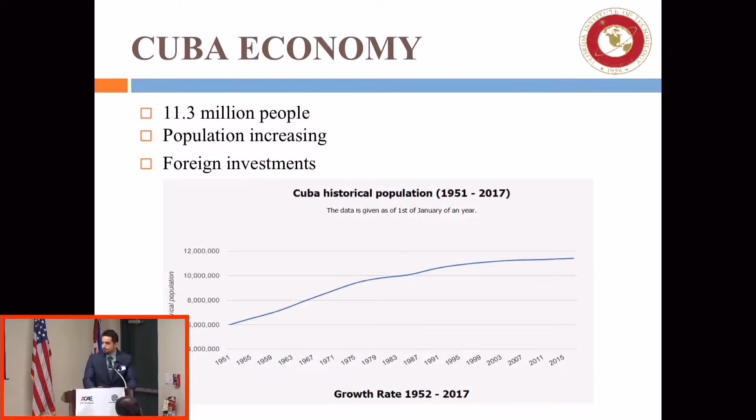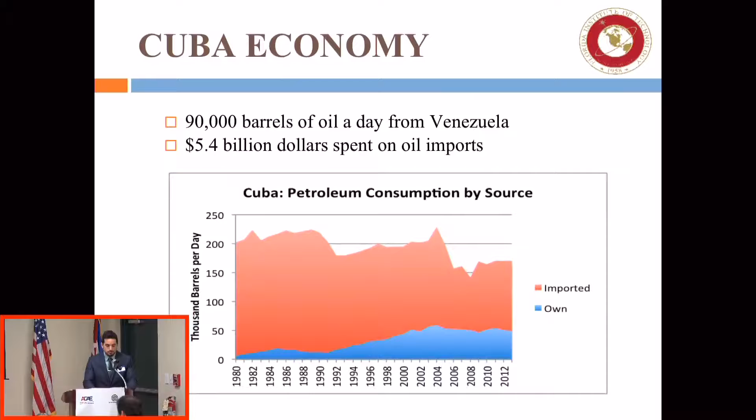Cuba is heavily reliant on foreign oil, as are many countries nowadays. In 2015, Raul Garcia Barrero, a senior official from Cuba's energy ministry, made it clear that getting off foreign oil is a high priority for the nation. The Cuban government also plans that by 2030, 24% of the country's energy needs will be sustained solely by renewable resources. This sum is pretty large, and the M-Wed team would like to contribute to Cuba's goal by leveraging the feasibility and simplicity of our senior design device to offset the cost of dependence on oil.

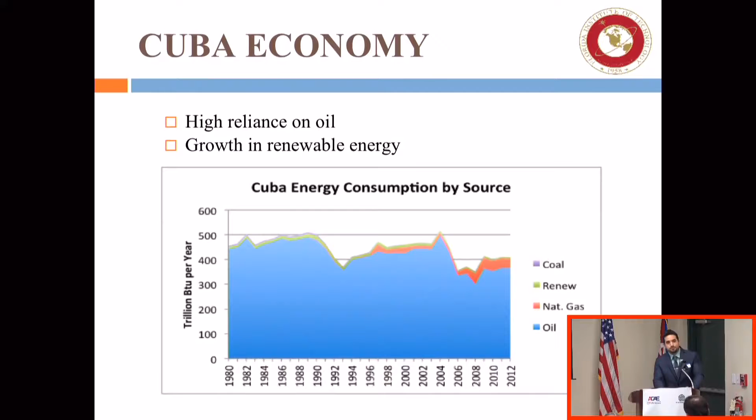So what is M-Wed? M-Wed stands for Magnetic Wave Energy Device. It utilizes the concept of Faraday's induction: a magnet oscillates through a coil, producing EMF, or electromotive force. As you can see in the image, we have three magnets. We also have a small-scale model on the judge's table. The first magnet is fixed, the second is moving, and the third is fixed as well.

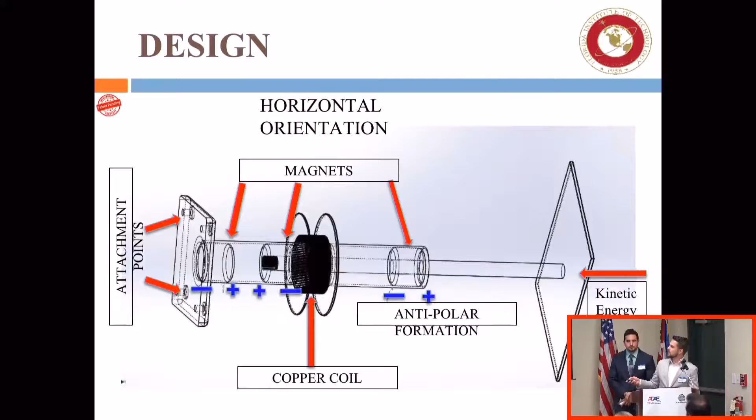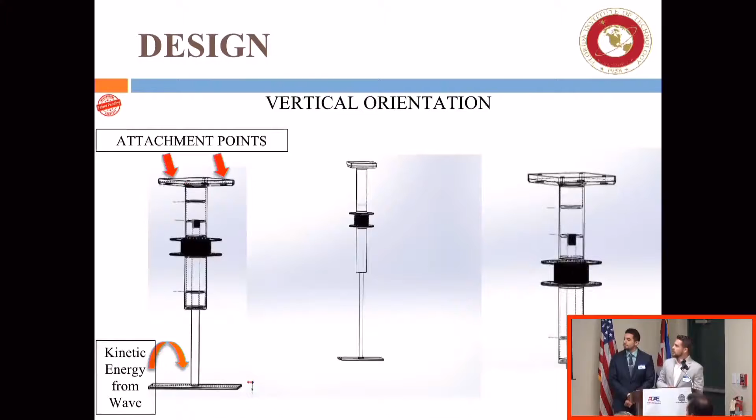The middle magnet is connected to this shaft. As it oscillates through the magnets, it produces EMF, and due to repulsion forces from the antipolar formation, it reverses direction and constantly oscillates back and forth. The kinetic energy from the wave exerts a force on the plate, causing the device to oscillate. We can do the same thing in a vertical orientation.

For analysis, here are some examples of what we did with our device. Initially, we created a 3D model to confirm it is in fact buildable. We also ran CFD, computational fluid dynamics, to determine the drag coefficients on the plate. Finally, we ran structural analysis to determine any stress points and strains on our device.

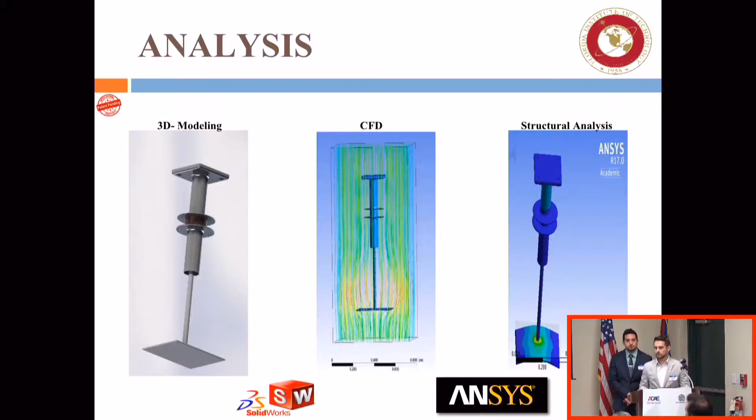The most significant analysis we performed is magnetic analysis. In this image, the blue area represents the magnet surpassing the coil, producing some voltage. That voltage, according to software we used called FEMM, Finite Element Method Magnetics, showed that in one oscillation we can produce 110 millivolts.

If we assume this device oscillates 1,000 times per day, it would generate about 110,000 millivolts, which converts to 110 volts. Utilizing Kirchhoff's power law, taking the 110 volts and receiving 3 amps from the software, we get 330 watts per device, approximately 0.33 kilowatts, or 7.92 kilowatt hours per day.

In one month, its efficiency is 237 kilowatt hours per month. To put things into perspective, the average household in the US uses approximately 908 kilowatt hours, a value we can achieve with 4 devices.

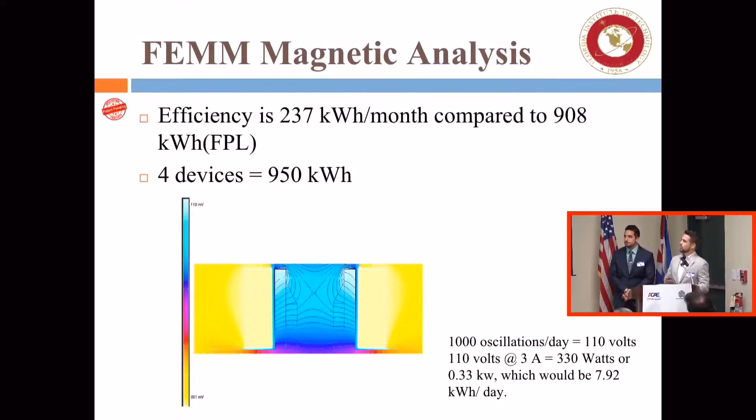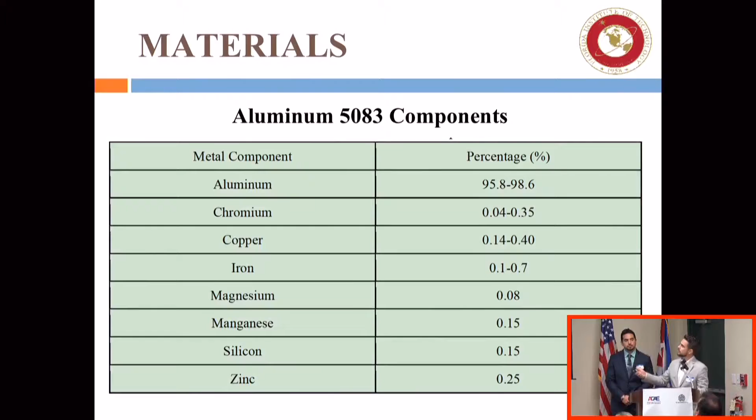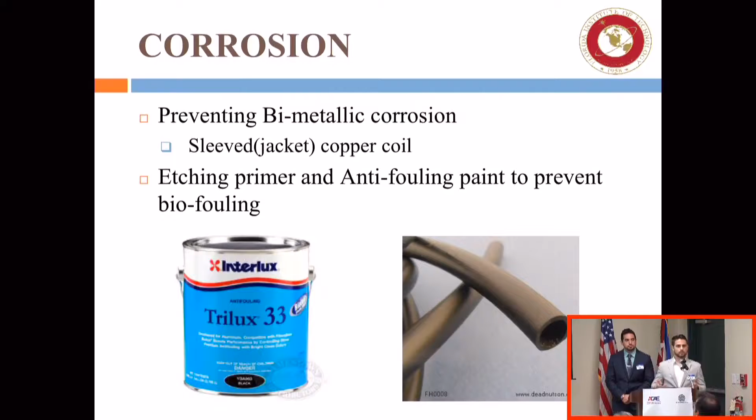Corrosion is a problematic factor when building ocean-based devices. To counteract bimetallic corrosion, we will sleeve our copper coil. We will also sleeve any screws that will mount the device to any surface. And in order to ensure longevity of our device, we'll be applying an anti-fouling paint to prevent biofouling. Biofouling is the growth of microorganisms such as tube worms and barnacles, anything that's placed in the water, on hulls of ships and such.

Welding itself introduces a lot of stress points in our device. We decided to pressure cast. On the image on your left, you see crack propagation, and due to the ocean, waves exert forces in the X, Y, and Z direction. So to be on the safe side, we decided to pressure cast.

On the image on your right, you can see how pressure casting is done. Basically, you make a mold of your device, you place your molten metal into the container, it goes through the refractory tubes, and your device is created, and then cooled.

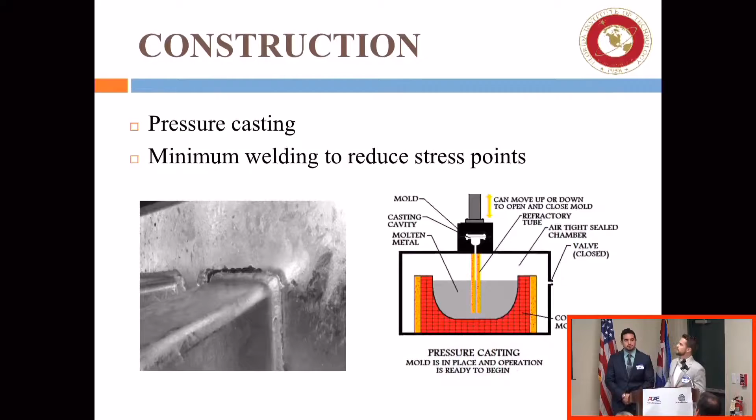Simplicity was also a very important factor of our device. You can see that we have a 6-piece assembly. The initial piece is the shaft shell, where the top magnet goes into it and it's fixed at the top. The bottom seal goes onto the threaded shaft here. Then the bottom magnet gets placed on top of the bottom seal, which goes onto the threaded shaft. The middle magnet is then threaded to the shaft, and all of this is put together to give you the device that you saw earlier and the device that is on the judge's table.

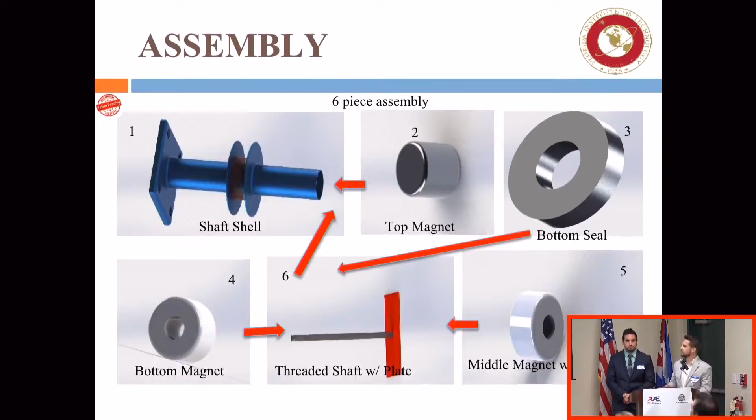This is our bill of materials. This takes into consideration current market prices of aluminum 5083, copper, as well as casting services. The casting services were determined from various companies throughout the state of Florida, and one device costs about $3,500 to produce. So earlier in the magnetic analysis, we said that we need 4 devices in order to produce the same as a US average household.

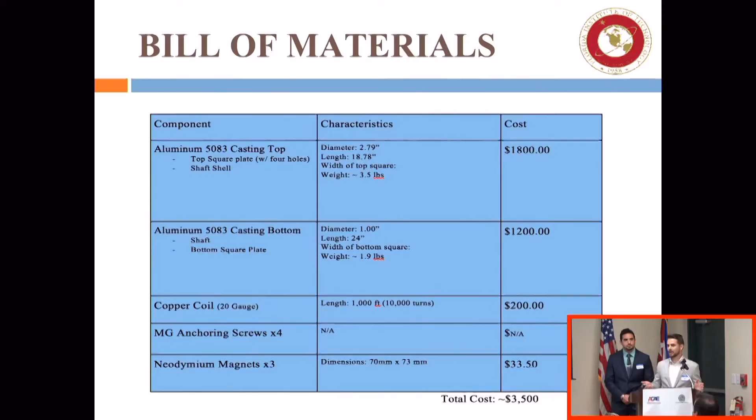So it would cost approximately $14,000. According to FP&L, in the US, we pay 12 cents per kilowatt hour. So in about 10 years, that costs about $13,000 to $14,000. So your return on investment for 4 devices would be about 10 years.

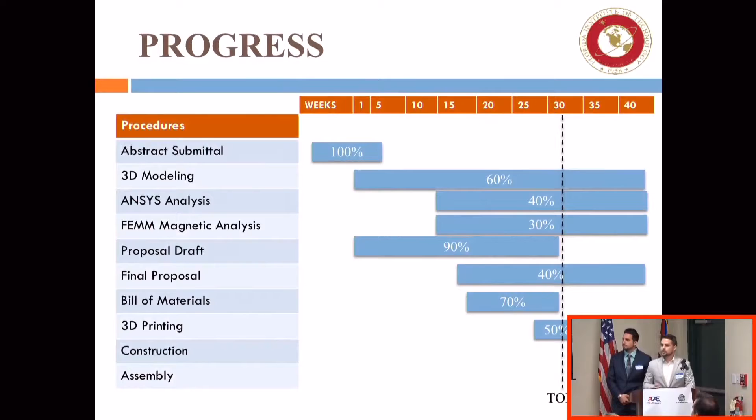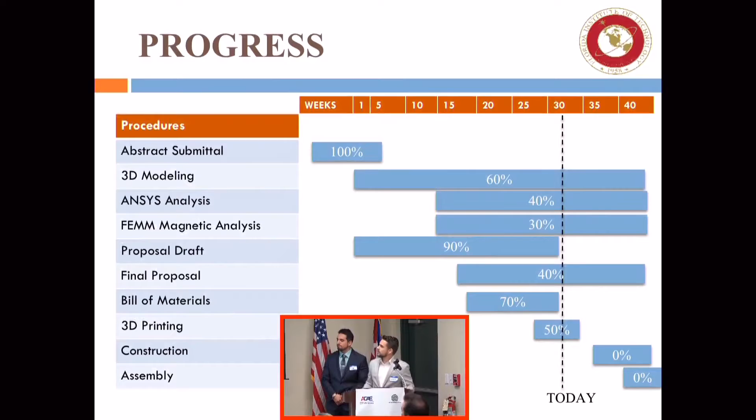And this is our Gantt chart. This just shows the progress that we've made in our research. Currently, we're at week 31, 32. So you can see that we've gone through all of these sections, including our abstract, 3D modeling. We will always continuously run analysis to make sure that we achieve the best efficiency. And we will soon be entering phase 3, which includes construction and assembly.

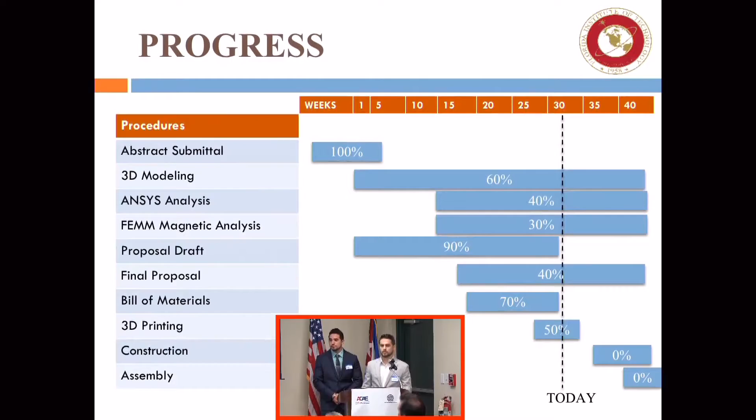The wave flows from the northeast direction with an average height of 5 feet, and it goes towards the southwest and northwest regions. The northwest region has a swell, generally caused by storms and hurricanes, which increases the wave height to approximately 9 feet. These waves generate big waves, and these big waves are not necessary for our device, as our device requires small waves and oscillations which move the shaft easily due to the force caused by the magnetic field. The northeast region also has swell, but it's reduced due to the Bahamian islands, which reduces the wave height to approximately 5 feet, which is suitable for our device.

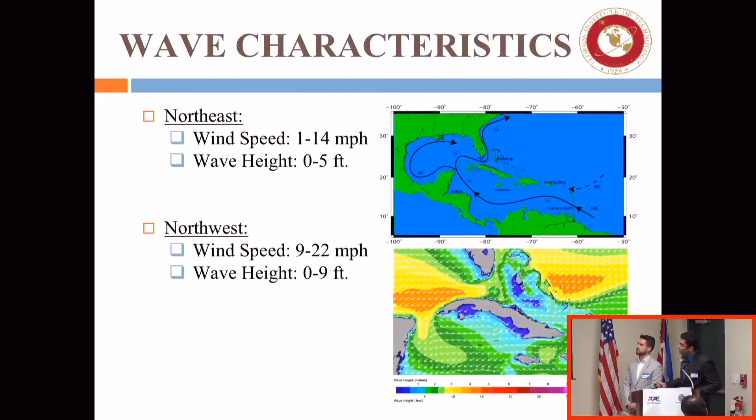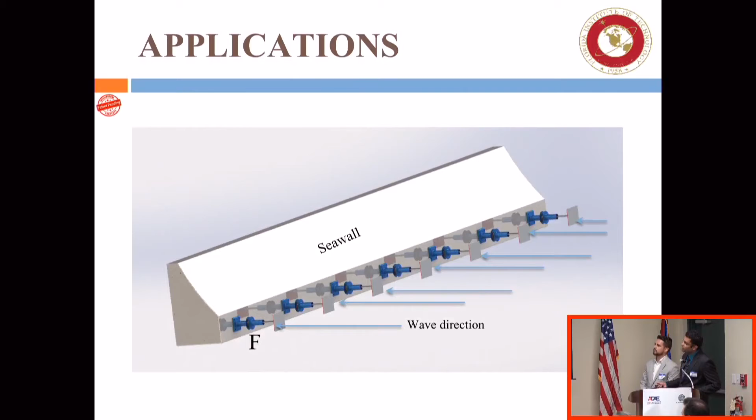In the northeast region, our device can be installed at Varadero, Puerto Padre, and Baracoa regions. This is a seawall where our device will be mounted horizontally. As the wave hits the plate, the magnet attached to the shaft will oscillate between the two antipolar magnets and will generate some energy.

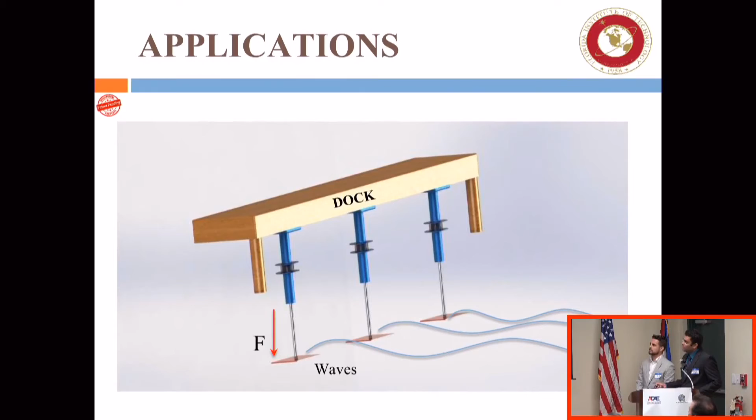So some of our other accomplishments is that we worked with the NASA JPL sustainably and environmentally friendly conference at Pasadena this last year. And some future outlooks are that we also plan to attend the conference in the Netherlands coming up.

Can I ask any questions?